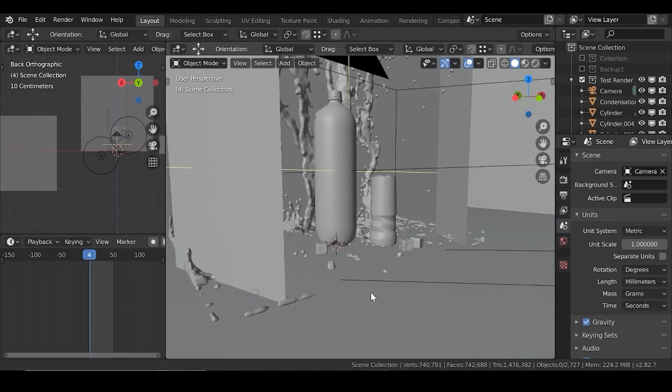This is going to be the first video in my Autodesk Fusion 360 beginner series, and in this video we're going to be looking at using the Extrude tool, and we're going to use that to create a nice dining room table, just a simple model to get you started using the Extrude tool.

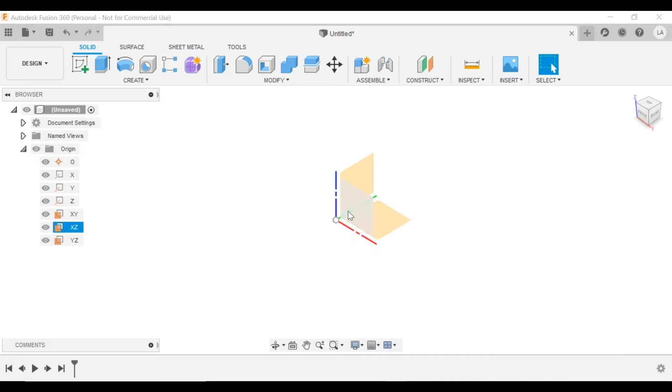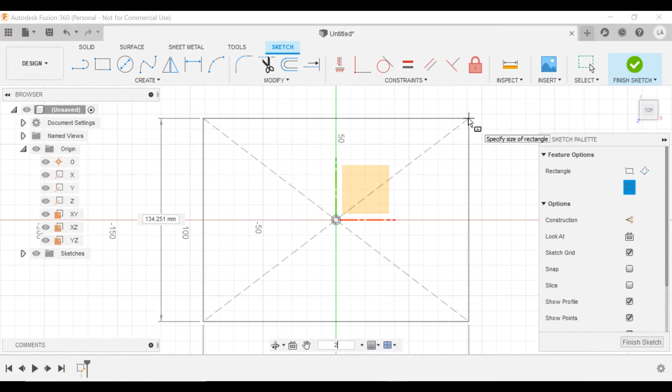To start with, we'll turn on our origin visibility. If we go to the top view on our view cube and select our XY plane, we create a new sketch. Go to the Create drop-down, go to Rectangle, and select Center Rectangle. Click the origin to put the center of the rectangle there, and make this 2000 millimeters by 1000, then hit enter to create that rectangle.

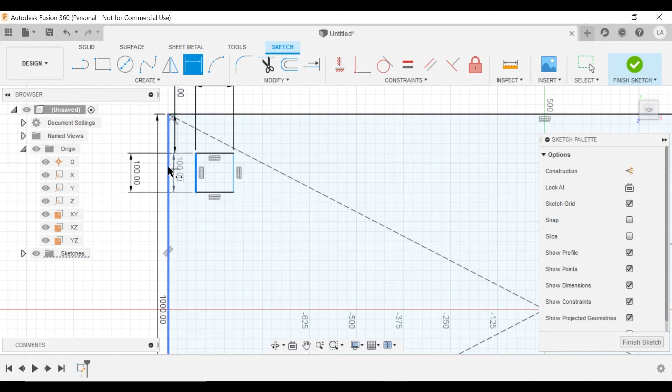Next we create the outline for our table leg, which is going to be 100 by 100 millimeters, and we'll dimension that away from the edge of the table at 100 on that side and 100 again on that side, but we'll use that first dimension to drive this one so they both stay equal.

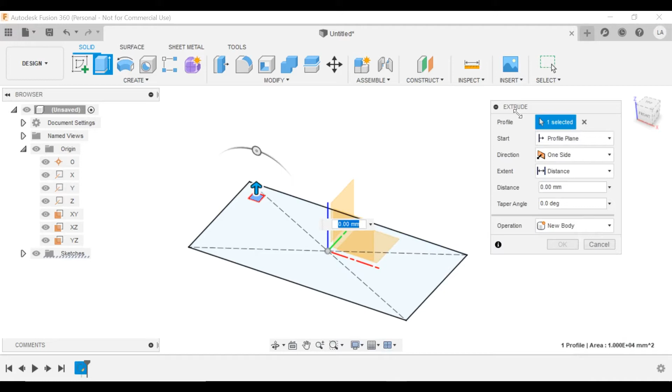If we finish that sketch and rotate it around here, go to the Extrude tool, and select the outline for our table leg. Now I'll talk you through a couple of the parameters on the Extrude panel here. You've got Profile, which is the profile that you've sketched out.

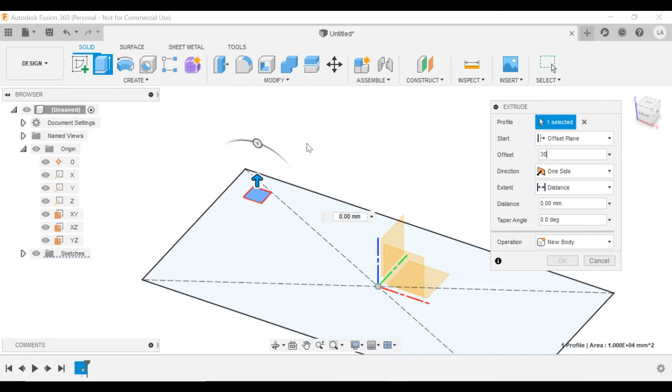For the Start box, there are a few different options. You can select Profile Plane, which starts it from where you've sketched your original sketch. You can select Offset Plane, where you can make the extrude start from a certain distance offset from your original sketch - so if you were to put 30 in there, it's starting a bit further up from the sketch. There's also From Object, where if you have another object in your file, you can select a face where you want the extrude to start and start it from there. So that's basically what they are.

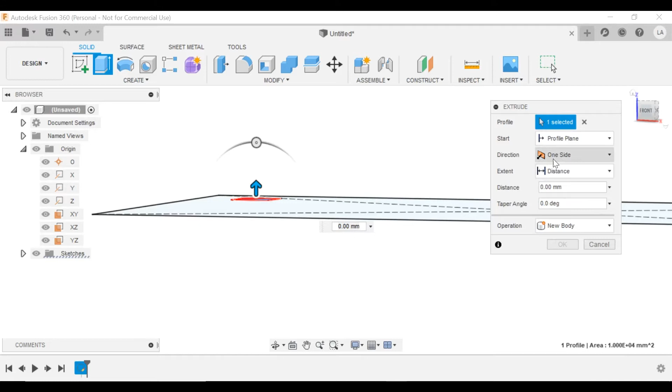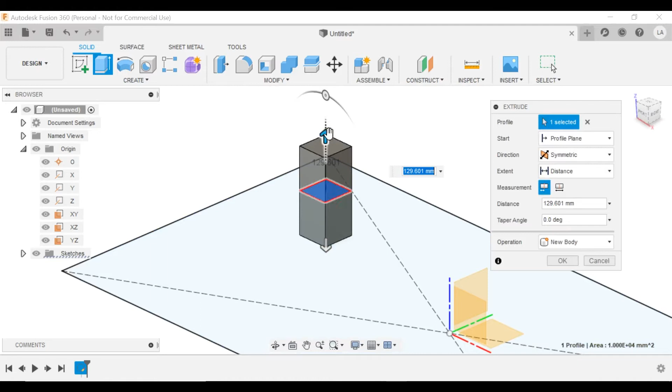But we're going to choose Profile Plane. For direction, you've got a few different options: One-Sided, which just extrudes it one side, Two-Sided, where you can put different values for the top and bottom of the extrude, and Symmetric, where both the top and bottom of the extrude will extrude at the same value - but we're just going to go for one side on ours.

For the extent, there are a few different ways you can set that - you can just type in a distance there, or put To Object, so if you select a face on another solid or the same solid, you could terminate the extrusion at that face, or you can extrude it through all, which extrudes through everything in the document. It's pretty straightforward, but we'll keep that a distance and put 800 millimeters in there.

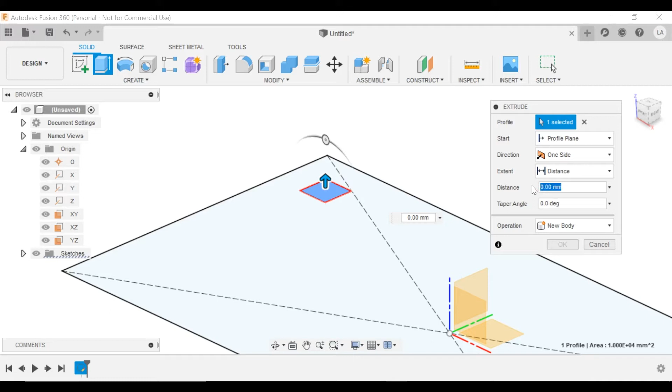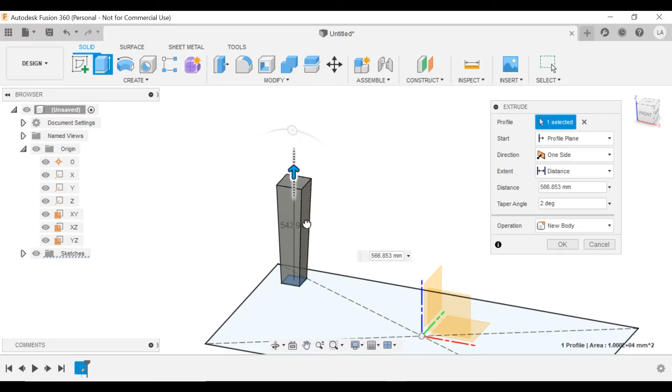Another thing we'll do is put a taper on this, just to make it look a bit nicer. If we put a 2-degree taper on there, you'll see how it gets bigger and flares as it gets to the top of the extrude, and that 2 degrees keeps along the extrude no matter what the distance is, so you can keep that constant. We'll just change that back to 800.

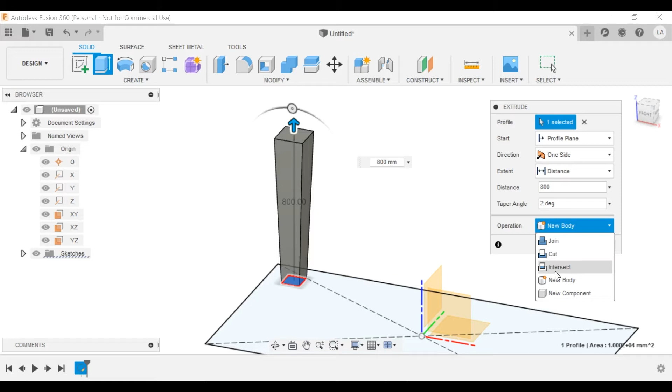Make sure the operation is set to New Body. You can either have Join, Cut, Intersect, or New Body. Join is where you can join the extrude onto a solid that's already in your document. Cut is where you can cut material away from an object that's already there using your extrude. Or Intersect, which is where if you extrude your profile, it'll keep where your profile intersects with the solid and get rid of everything else. Or obviously New Body or New Component, which is pretty self-explanatory.

So we'll go for New Body, and click OK. So we've got our first table leg there, and we need a couple more of them.

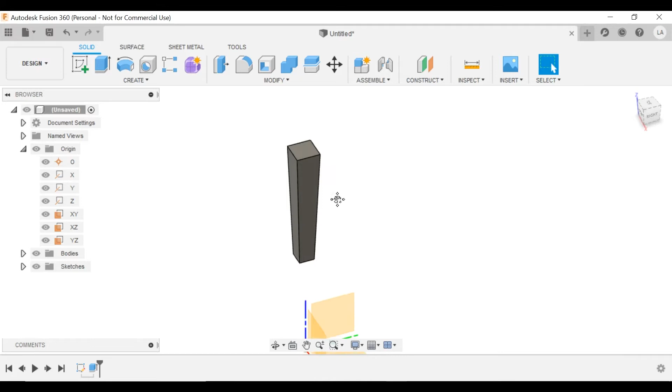I will go to Create, click on Mirror, and there are different types of pattern that you can do. So faces, where you can mirror faces, bodies, features, which are the different features used to create your solid - so the extrude or a sweep or whatever - or a different component that's in the scene.

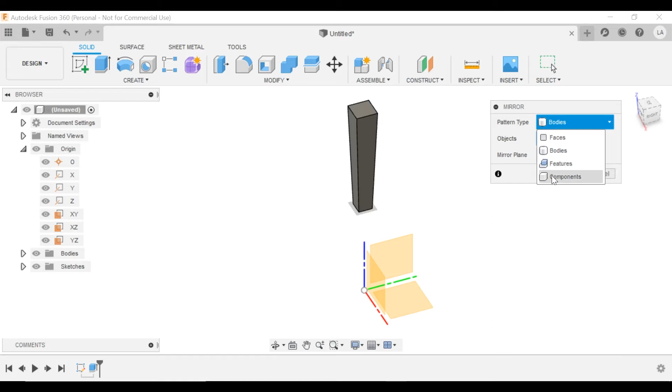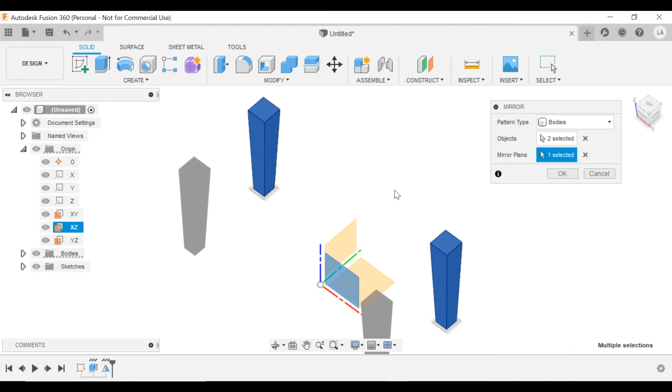But we're going to go for bodies, and if you select the table leg and mirror it across the YZ plane, click OK, and we've got our second leg. If we do that again, select both of those and mirror those across the XZ plane, click OK, and now we've got 4 table legs.

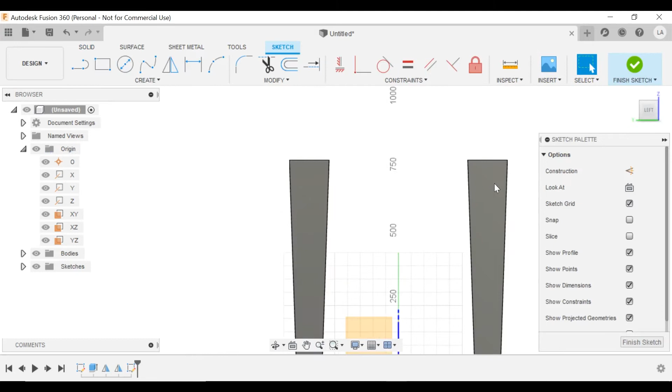So the next thing we're going to do is put a couple of beams in between these legs to create the frame. The first thing we're going to do is create a sketch on the YZ plane. If we hit slice to get rid of those 2 legs and just cut through the scene, then select the top edge, hit P to project that through, click OK, and that puts it onto your sketch plane.

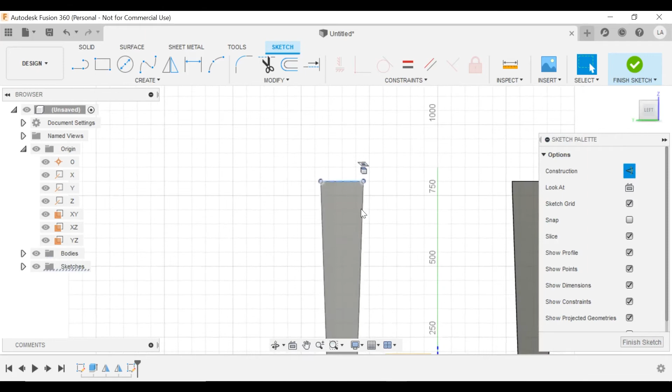Make sure that's on construction, then we're going to put in a rectangle that is 150 by 100 and hit enter. We're going to constrain the center point of this line onto the one we just projected through. The way to do that is hold shift with your coincident constraint selected, hover over that edge to bring up the center point. Do the same for the other one, select that, and that constrains it together.

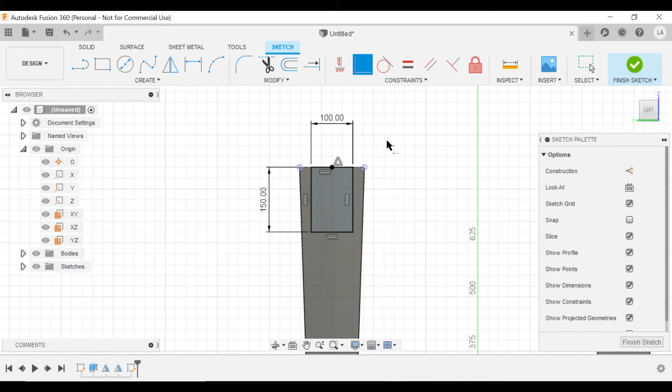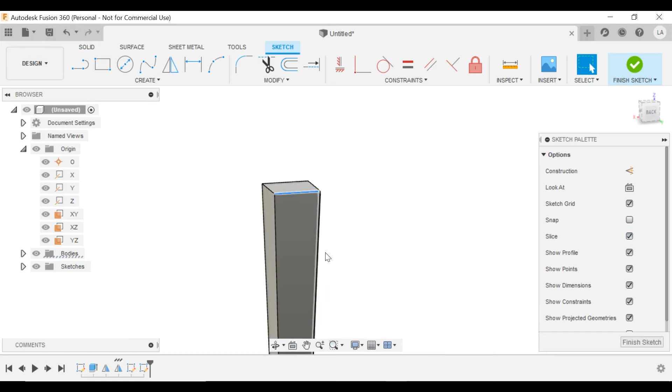If you finish your sketch there, next we're going to add the same sketch on the XZ plane. Select that, click create sketch, tick slice to slice the view, select the top edge and project that through, click OK, and make that a construction line. We're just going to draw the same rectangle again, 150 by 100, hit enter, and again constrain those midpoints.

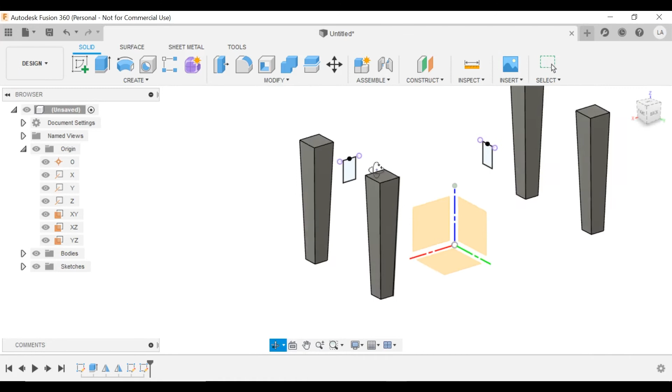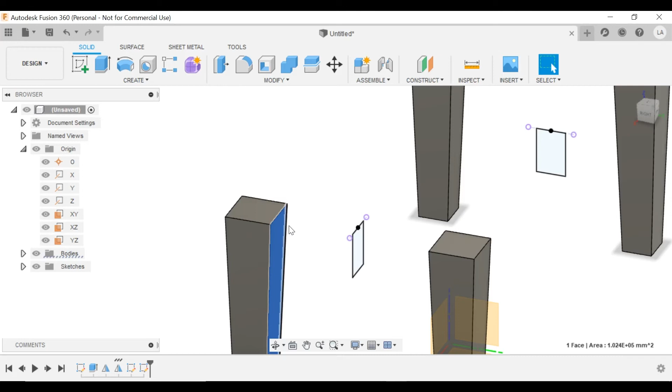So we've got our sketches there, and we've got a bit of an issue because we've put a taper on these table legs. If we just extrude that straight in there as a new solid, it will look fine, but it won't have the profile of the table legs, and it won't meet face to face. So what we're going to do with our extrude is go to extrude and select the profile you've just sketched.

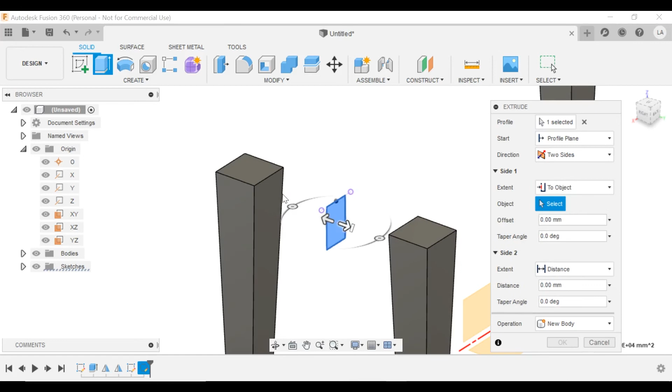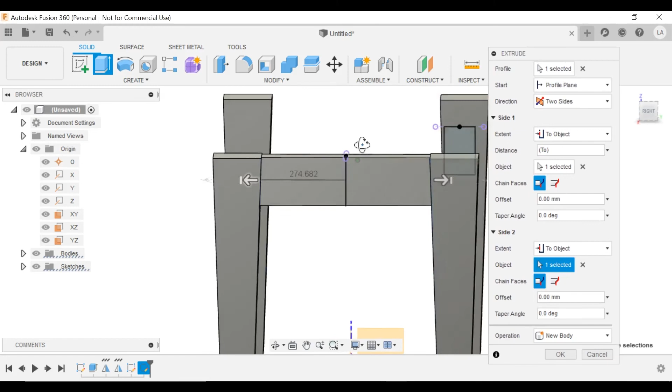We're going to click 2 sides, and for the extent on side 1 we'll click to object and select that face first, and on the second one again go to object and select that face. As you can see, that extrudes between those 2 faces, but it's currently set to join, and we don't want that. We want that as a new body, so click new body and then click OK, and you'll see that the beam across between the 2 legs has now mimicked the taper and meets perfectly with those.

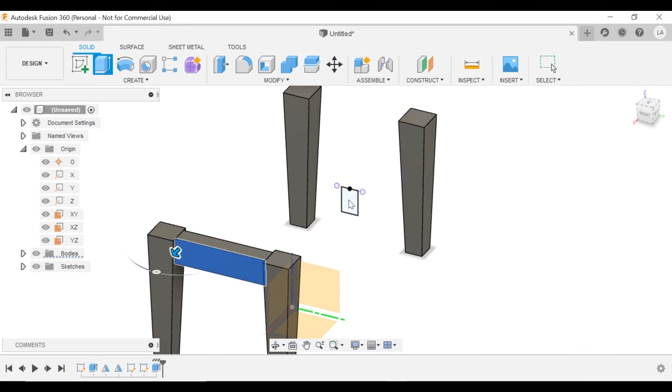So we'll do the same for this side here. Again, go 2 sides, to object, and select the first face. Go to the second side, to object, and select the second face. Again, make sure that's set to new body.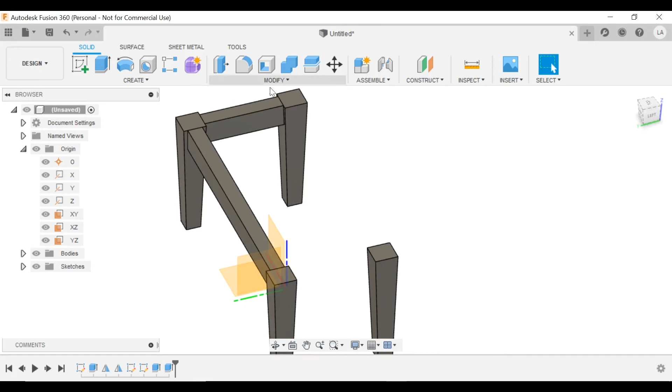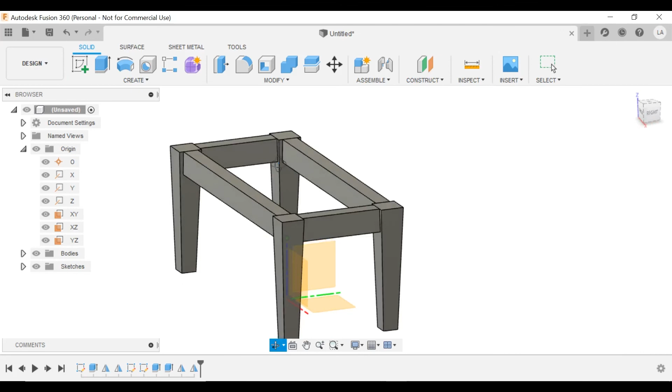So next what we've got to do is just mirror these 2 beams across to complete the frame. Go to create and then mirror. Select the first one, mirror that across the YZ. Then with the other side, mirror that across the XZ. And there we go, that's the basic frame done.

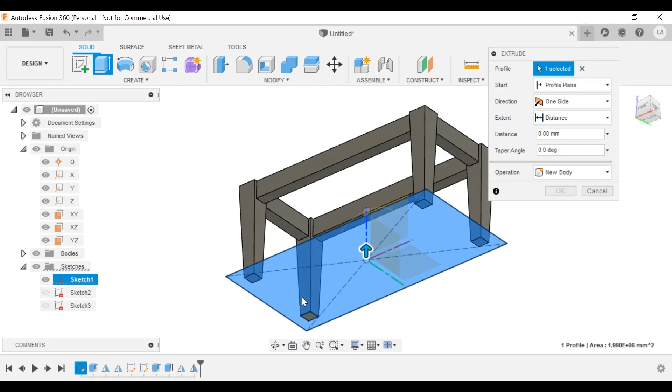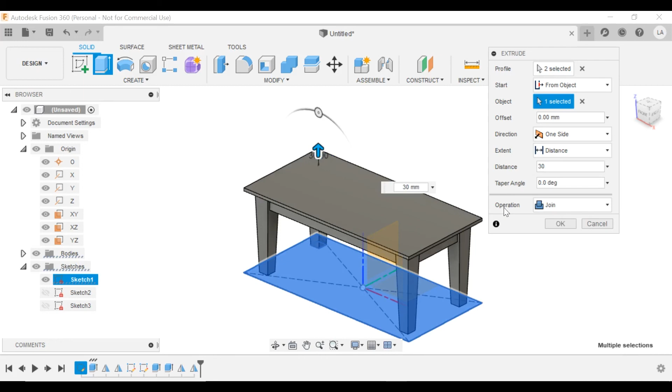Next, if we bring back the original sketch we created earlier, go to our extrude tool. This is where we're going to use the different start point for this extrude. First select our profile, select everything in that sketch, and on the start tab go to from object. Select the top face of that table leg, and keep it at distance for the extent and put 30mm in there. Set join, and click OK.

As you can see, that's transferred the profile from this sketch down here and just put it up there, so it sits nicely on top of the table legs. So there we go, that's your basic table using just the extrude tool finished.